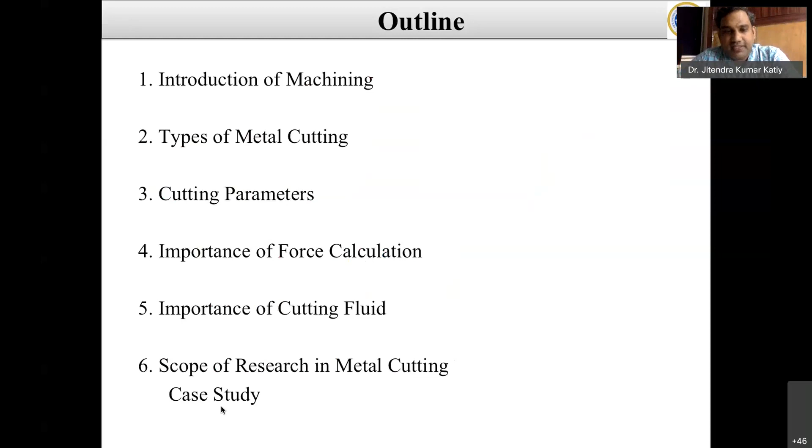In terms of metal cutting, this is a machining process, and from this process we remove material to shape a particular desired final product. We remove excess material from the workpiece in the form of chip. Chips are generated in a larger way, and it is the most important manufacturing process among all. By this process we can get the final shape, size, and metal removal, either directly or indirectly.

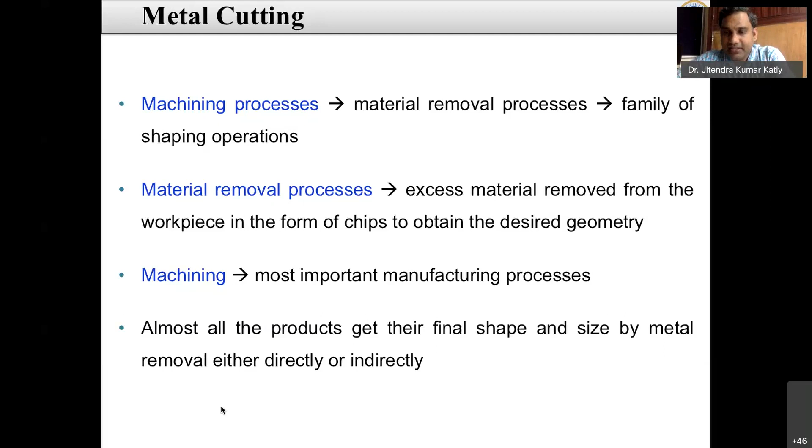There are various types of material removal processes: traditional and advanced process. Traditional includes the metal cutting process like turning. Traditional is further divided into two groups, cutting and finishing. This cutting is further divided according to whether your object is circular shape or non-circular shape, and according to that we choose the particular machining process.

In finishing process also we can choose two types, either using bonded abrasives or loose abrasives. Bonded abrasives like sandpaper is the cheapest one, and loose abrasive is where you spray the particle, like buffing, lapping, and polishing.

Advanced processes are nothing but non-traditional or unconventional processes, like electric discharge machining, electrochemical machining, electrochemical grinding, electric discharge grinding, and drilling. These are the various kinds of advanced processes where your tool and workpiece are not in contact.

But in the traditional process, your tool and workpiece are in contact. That is very important, because when two bodies are in contact, friction and wear always happen.

The machining is performed by two types of cutting tools, single point cutting tool or multiple point cutting tool. Single point cutting tool is basically used in lathe, shaper, planer like this. Multiple point cutting tool is used in drilling or milling.

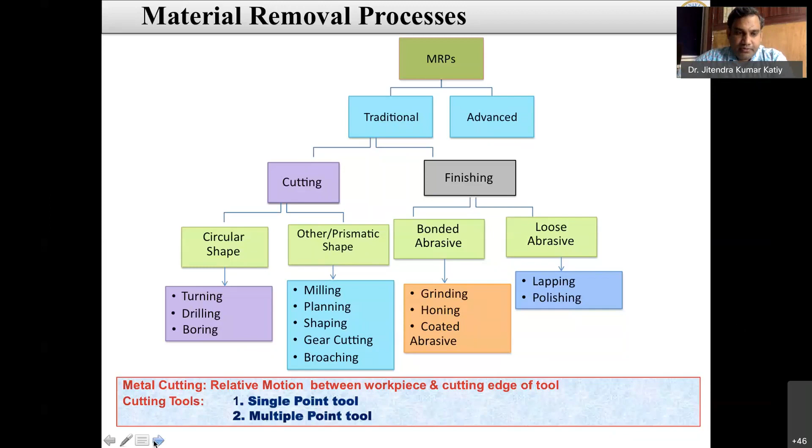Important points to note about the characteristics of metal cutting: you can improve dimensional accuracy and tolerances, and also achieve internal or external features. The only drawback in metal cutting is that you remove a large amount of material from the surface in the form of chips, and there are disposability issues with those chips. It is also the most expensive among all the manufacturing processes.

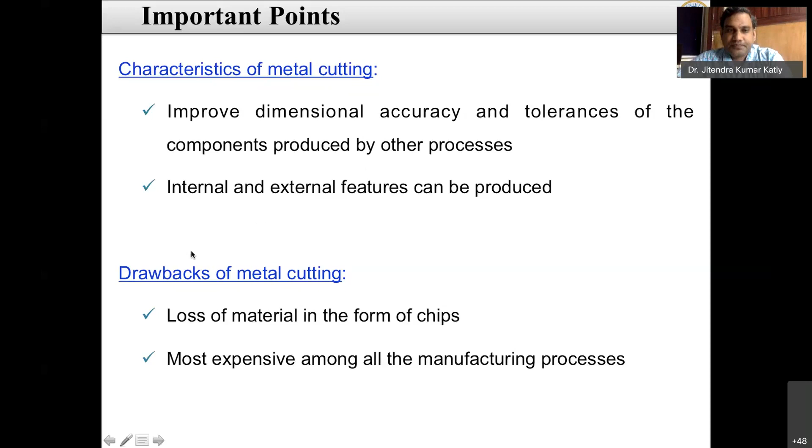There are two types of cutting: 2D cutting or 3D cutting. 2D cutting is known as orthogonal cutting, and 3D cutting is known as oblique cutting process. In oblique cutting, the tool has some inclination with the workpiece, while it is perpendicular with the cutting speed in orthogonal cutting. That is the only difference between orthogonal cutting and oblique cutting.

Most experiments performed in a normal workshop are oblique cutting. There are three forces acting over the surface, like in turning and milling, and these are all performed in oblique cutting. Only if you want to cut a rod would you go for orthogonal cutting, so this is the least used process compared to oblique cutting.

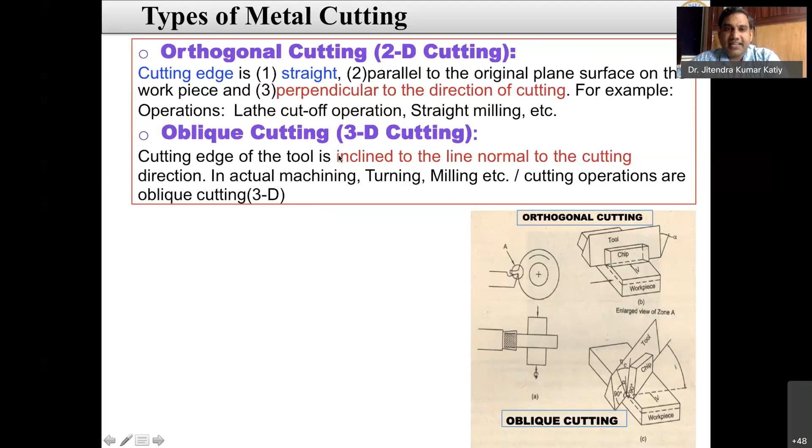In metal cutting, there are various machining conditions: what type of workpiece material you want to turn, what type of cutting tool, what is the cutting geometry, because the rake angle is widely important - either positive, negative, or zero rake angle. These are the principal cutting conditions, and all four cutting conditions are very important: cutting speed, feed, and depth of cut.

Nowadays, cutting fluid is also included as one of these conditions. That's why Taylor's tool life equation is VT^n equals constant.

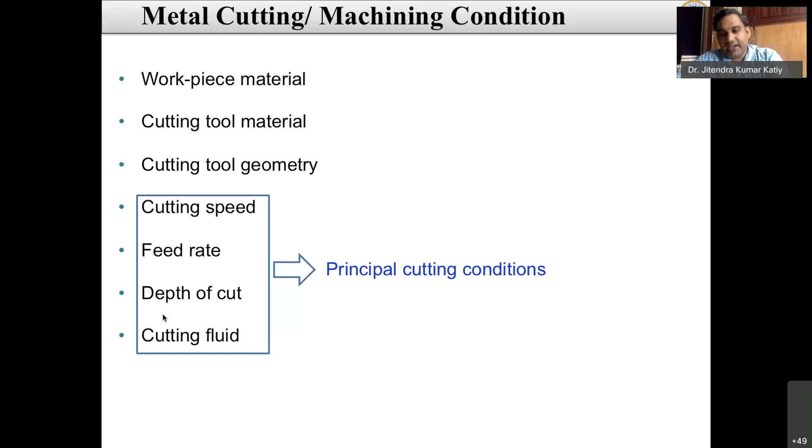After that, they modified and included the feed and depth of cut also in that particular Taylor's tool life equation. They just set some exponents, and that feed exponent is always greater than the depth exponent. So these are the few important parameters in cutting conditions which affect the material removal rate and the wear of the tool surface.

So why do we need this calculation of forces? Why do we analyze the cutting forces? By analyzing these forces, we can estimate the power requirement of the machine tool. According to that, we can design our machine tool and select the motors for that particular machine tool.

We can also improve static or dynamic stiffness of the machine tool using these force calculations. You can improve part accuracy from the tool-workpiece deflection also, because how much force it can exert depends on the tool stiffness, which is also very important.

Tool toughness and tool strength are also very important, so that it will not deflect. Because your tool acts as a fixed cantilever beam - one end is fixed and the other end has a point load. So in that way, we design the tool toughness and strength. These are the few design aspects in which cutting force analysis is very important. That's why cutting force analysis is important.

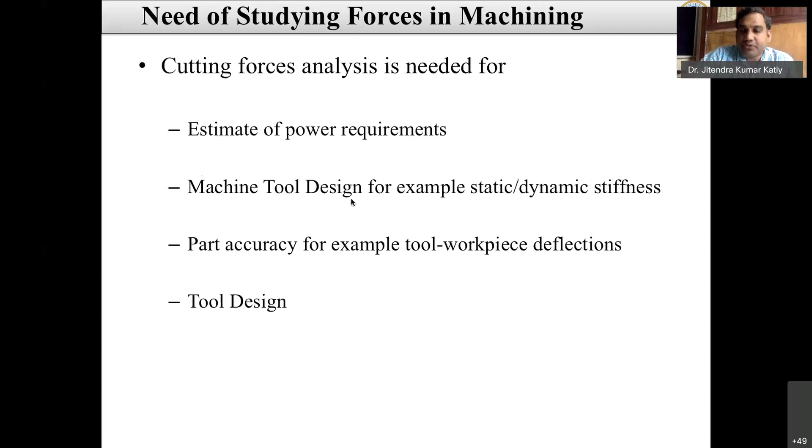There are three zones in metal cutting. One is called the shearing zone. This is the zone through which the material deforms and breaks, and flows over the work surface. It shears and flows over the tool surface and moves away in the form of a chip.

Another zone is the chip-tool interface. This zone is very important, because when the chip is sheared from the shearing zone, it has a very high temperature. Due to that high temperature, it can melt the material and diffuse some material over the chip, and that creates crater wear over the rake surface and flank wear over the flank surface.

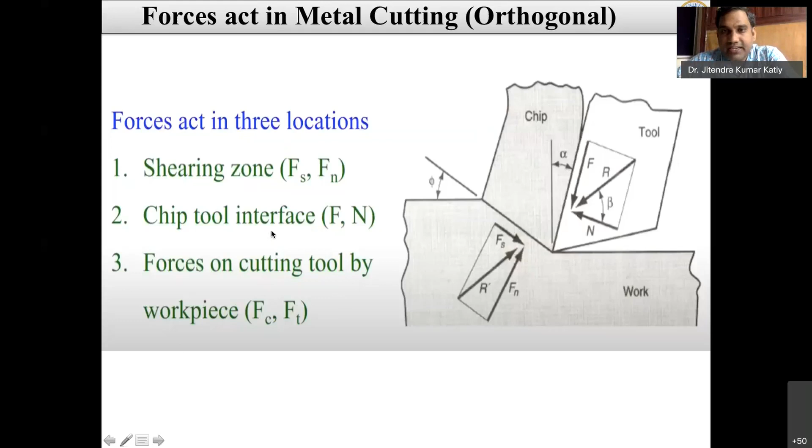So for this force measurement, we install our force dynamometer, and this is the tool. You can see here the sharp edge, and this is the rake face through which your chip is moving.

This force dynamometer has three piezoelectric sensors. According to the deflection exerted by the tool through the workpiece, these piezoelectric crystals deflect, and they give output in the form of voltage - either millivolts or microvolts.

That voltage is further converted into force through LabVIEW software. So this piezoelectric sensor only gives you the signal in the form of voltage.

So which force is greater in that particular turning operation? According to how much the piezoelectric crystals deflect, you get the force or a higher peak in any direction - Fx, Fy, or Fz. That is the force measurement, and piezoelectric crystals are widely used because they can sense deflection immediately - even a small deflection can be sensed by the piezoelectric crystals.

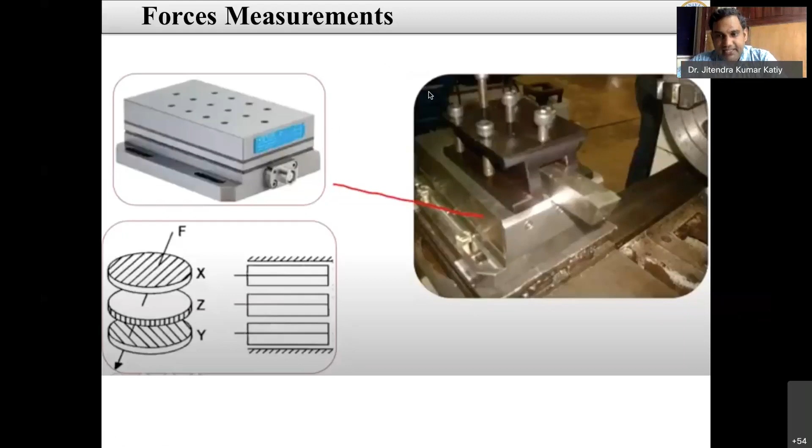So with these assumptions, how can we calculate the force? We know the theory given by Eugene Merchant in 1945.

They calculated the force using 2D force analysis, known as orthogonal analysis, by taking certain basic assumptions: the tool is very sharp, perpendicular to the velocity, and the material is perfectly plastic and rigid.

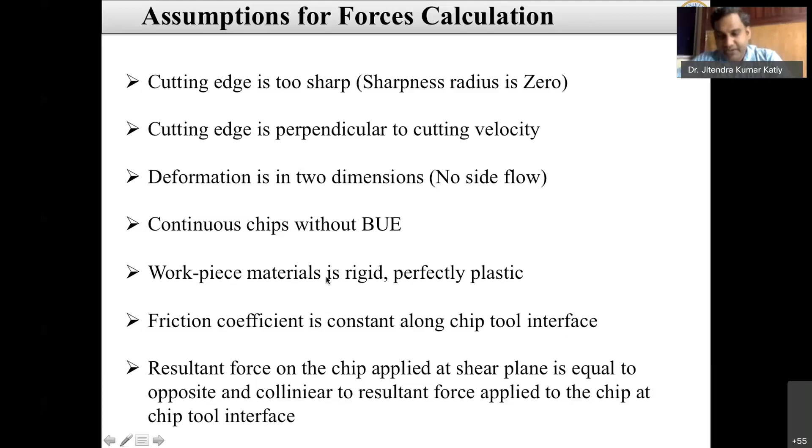These are the various assumptions taken by Eugene Merchant, and using this force analysis, they constructed a circle. Why did he choose the circle? Because in the circle, each element, each force, is at 90 degrees. We know the ninth class theorem that if the circle's periphery is 90 degrees, then the hypotenuse passes through the center of that circle.

That's why he chose the circle only, that's why it is called the Merchant circle, not any other geometry. Because all the angles on the periphery are 90 degrees, and this resultant passes through the center of the circle. After this, they can analyze the force analysis in terms of shear force or rake angle.

These two you can calculate by using formula. FC and FT you can know by the force dynamometer, and you can calculate the shear force so that you can analyze the shear stresses and other things. You can also analyze the frictional force so that you can at least reduce it in some aspects. That is very important in tribological aspects.

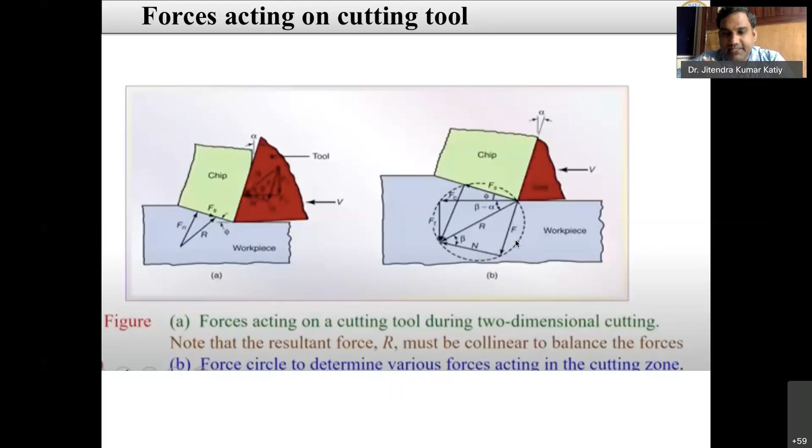And if your speed is high and depth of cut and feed are low, then the thin zone model is always selected for simulation. This slide is only for simulation purposes, if you want to do some simulation work in that particular tool-chip interface, and to decide what type of model you will select. So now we move to the chip-tool interaction.

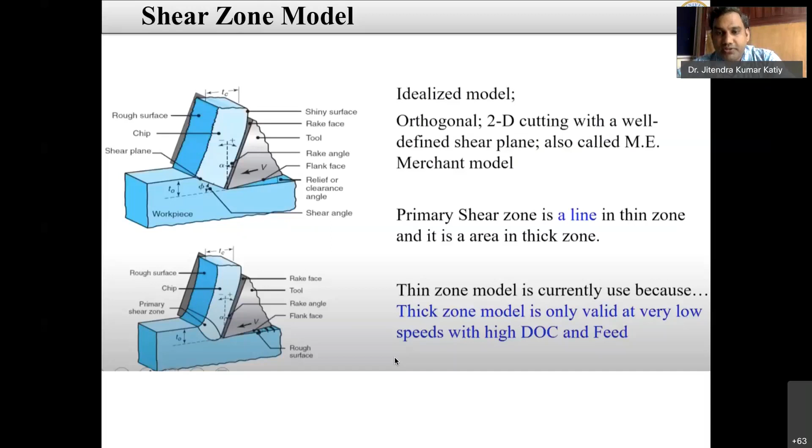That is very, very important, because the second highest heat generation is at the surface, and because of that the crater wear happens over the tool. So how did this come to be understood, back in the 1970s?

This chip-tool interaction was first studied by a French scientist. In this particular study, he took a transparent tool for cutting so that he could observe each and every aspect, and constructed a setup to study the chip-tool interface.

He observed that the chip material is sticking to the rake surface. It first sticks because of the high temperature, and because of high speed it also slides after some time. So due to this sticking, sliding then happens. Sticking and sliding in between causes diffusion of the chip material into the tool material.

That's why crater wear is always away from the nose, because the nose temperature is very high. So right at the nose you can't get crater wear, but it occurs a little away from the cutting edge. This is because of the sticking region followed by the sliding region. When it sticks, no material is eliminated from the surface, but when it tries to slide after sticking, then material is eliminated. That is the basic reason for these two zones observed in chip-tool interaction.

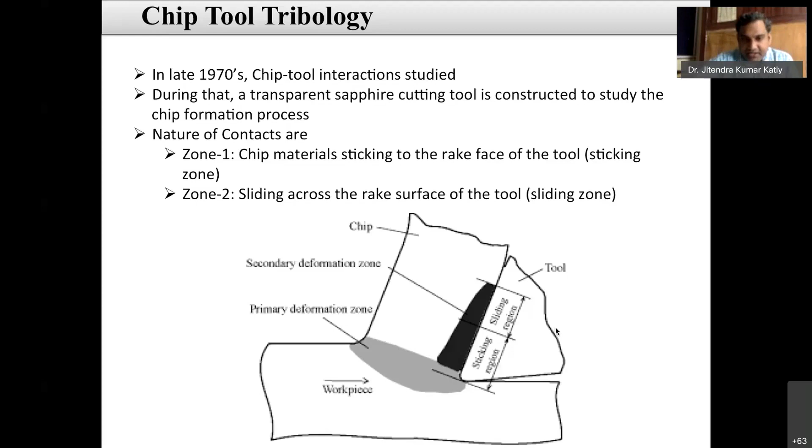After that, in the sliding zone, the locking becomes delocking, and the chip slides over the surface. So that is the main fundamental schematic through which the mechanism of chip-tool interaction is given, by this IJMTM study.

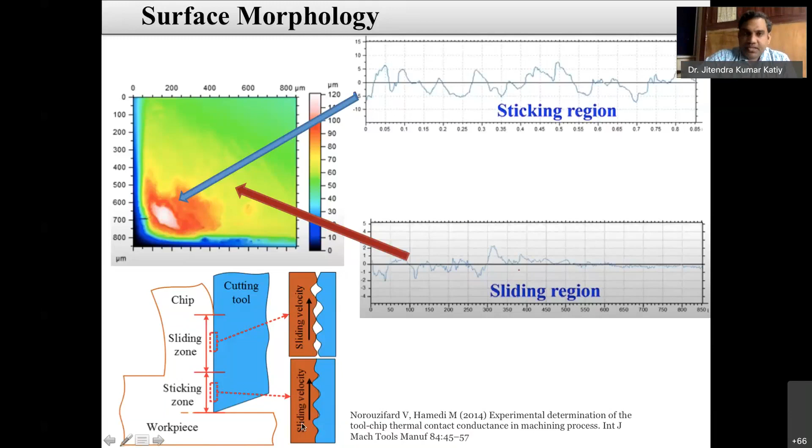So further, we know that for cutting fluid, there is conventional wet machining, where we can use flood cutting tool cooling. So why do we need metal cutting fluid in that particular case?

So first reason, you can remove the heat at the interface. You can easily remove the chips, reduce the tool wear, and also you can obtain a better surface finish. So that's why we use the cutting fluid, and that is very, very important.

Which type of cutting fluid you can select is important. Nowadays, because of environmental issues, we are focusing on biodegradable cutting fluid. So that is also necessary. You can use vegetable oils by mixing in some nanoparticles. That is why we need to use nanoparticles, because nanoparticles have better thermal conductivity, which is very important to transfer heat from the interface.

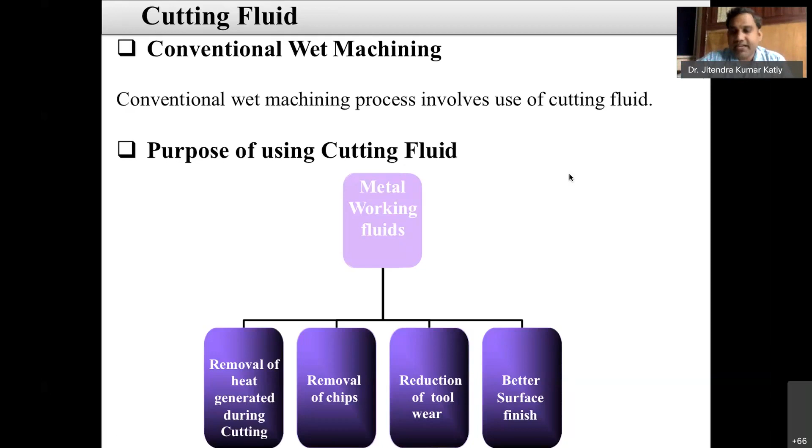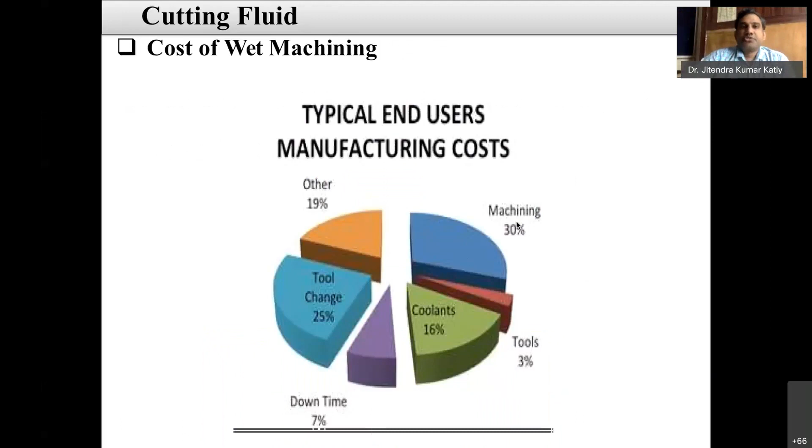So the major problem with the conventional process is that if you are using flood cooling, then you will get dirtiness in your floor space, corrosion and contamination of lubricating systems, pollution and health hazards because fume is generated. That fume also creates skin cancer for whoever operator is working in that particular space. It also needs storage and additional floor space, pumping system, recycling and disposal. So these are the few problems.

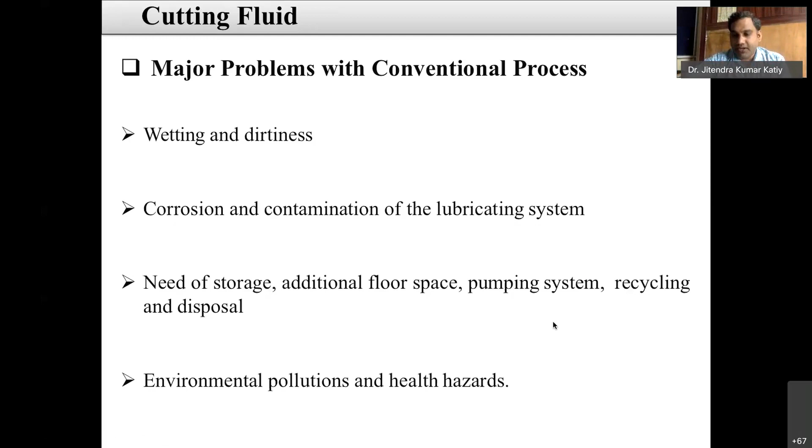That's why it is very important to move from conventional cooling to minimum quantity lubrication, where 100 ml of lubricant is enough for machining 1 hour or 3 to 4 hours.

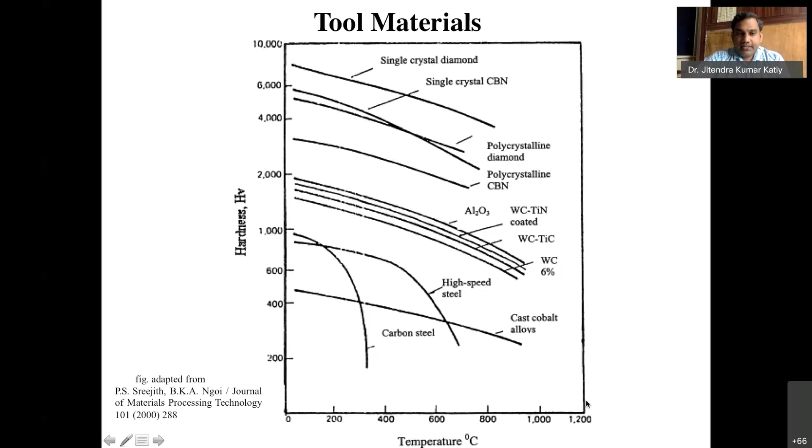So we move to minimum quantity lubrication machining. Here, as I told you, we use a very small quantity of lubricant applied on the cutting zone. This minimum quantity lubrication is applied with compressed air. So in that particular lubricant, you can add nanoparticles, and those nanoparticles can impinge on the cutting tool along with the air.

Normal consumption is restricted to 10 to 100 ml per hour according to our flow rate, whatever flow rate we have given. So optimum flow rate is also very important in minimum quantity lubrication. Optimum pressure is very important too. How much quantity of oil and air can be mixed also affects our performance.

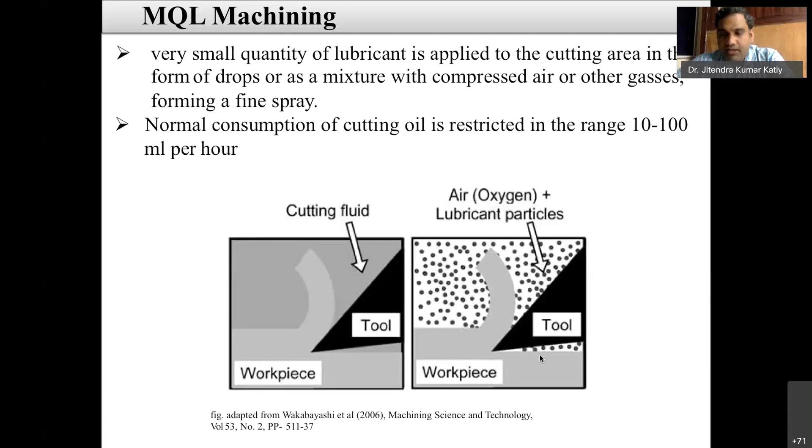So this is the widely used current trend in machining using minimum quantity lubrication. Whether you are working in grinding, milling, shaping, planing, drilling, whatever, this minimum quantity lubrication plays a very important role to avoid flood cooling. This minimum quantity lubrication, in terms of thermoelectric cooling systems, is also very important.

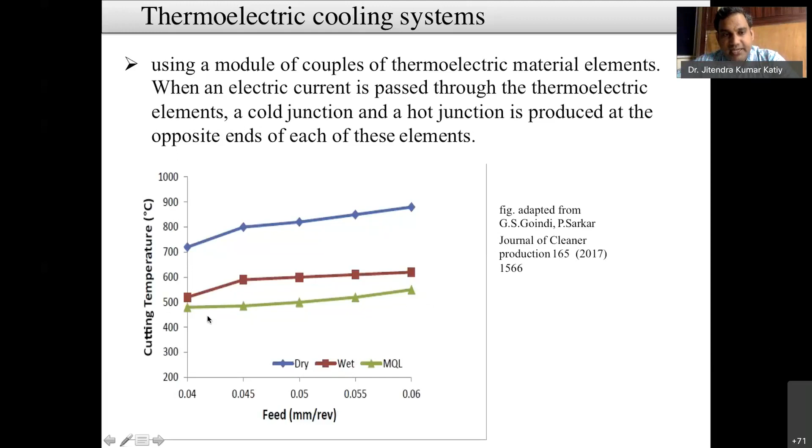This is because your nozzle has high impact at the cutting zone. So that high impact cutting fluid reduces the temperature, and it exerts thermal conductivity, meaning whatever temperature is generated, it can easily cool because of the high temperature increment of the cutting fluid over the zone. Because of that reason, in minimum quantity lubrication, even though cutting feed rate is increased, your cutting temperature is more or less the same in all cases.

So we move to our two case studies, what we did here at SRM-IST. In the first case study, as I told you, why we use the nanoparticle inside the cutting fluid is because we need to increase the thermal conductivity. And why we need to increase the thermal conductivity is so we can increase the heat transfer at the zone.

So in this study, what I will do is use graphite and talc nanoparticles mixed with coconut oil. According to vegetable oils, the fatty acids and other organic components can provide better lubricity properties rather than mineral oil and synthetic oils. So we used coconut oil because in the southern region it is easily available as a cutting fluid.

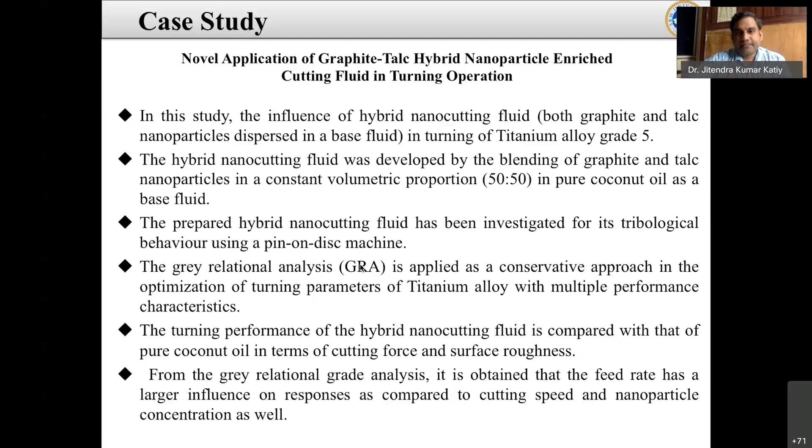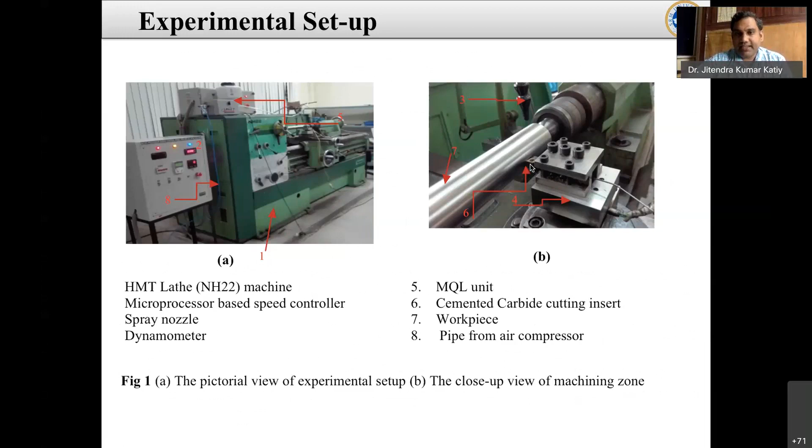Further, the compressed air from the compressor goes and mixes inside the minimum quantity lubrication setup pump along with the cutting fluid, and it goes through the nozzle to the zone where it is required. So this is the basic experimental setup of minimum quantity lubrication.

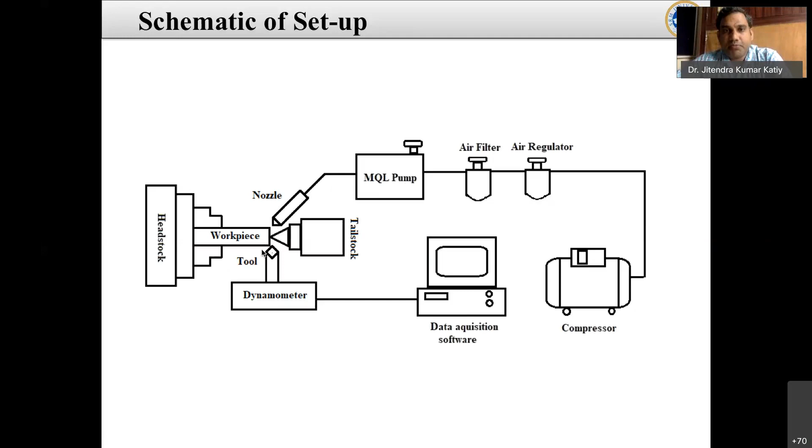Why did I choose graphite and talc? Because graphite gives a low coefficient of friction and talc gives high wear resistance property. Because of that reason I chose graphite and talc, since I had already published several papers on graphite and talc during my doctorate. So I thought here also I could choose graphite and talc and observe that factor's effect on the output parameter.

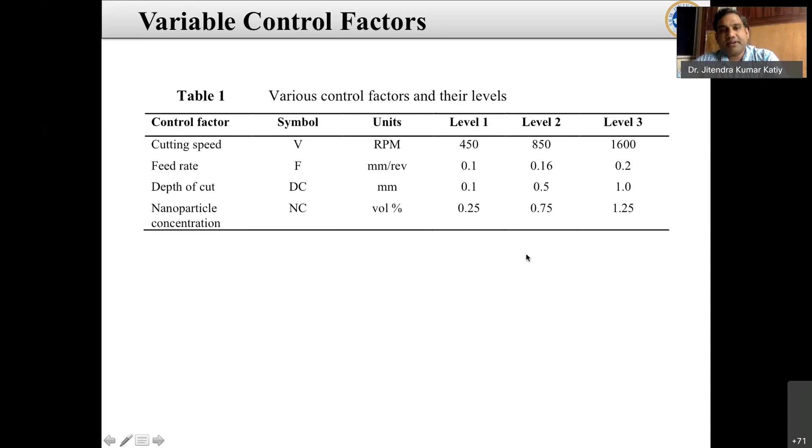These are the two machining response parameters: cutting forces and surface roughness. We performed a Taguchi analysis with a total of 9 experiments. From all those 9 experiments, we observed that 450 RPM, 0.1 depth of cut, 0.1 mm/revolution feed, and 0.25 nanoparticle concentration give us lower forces and also lower surface roughness.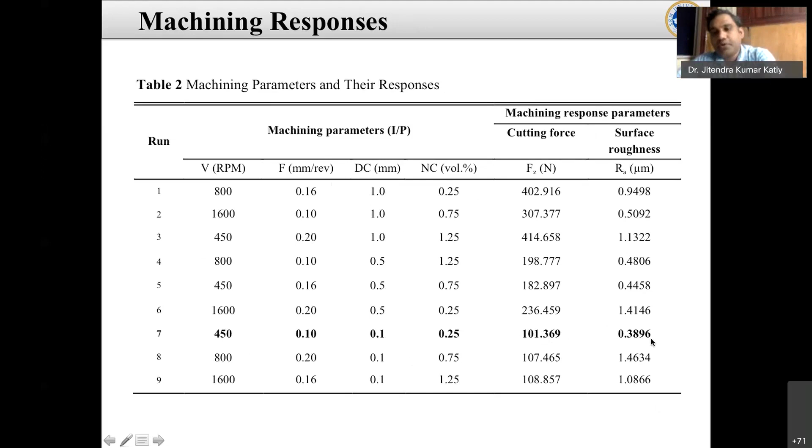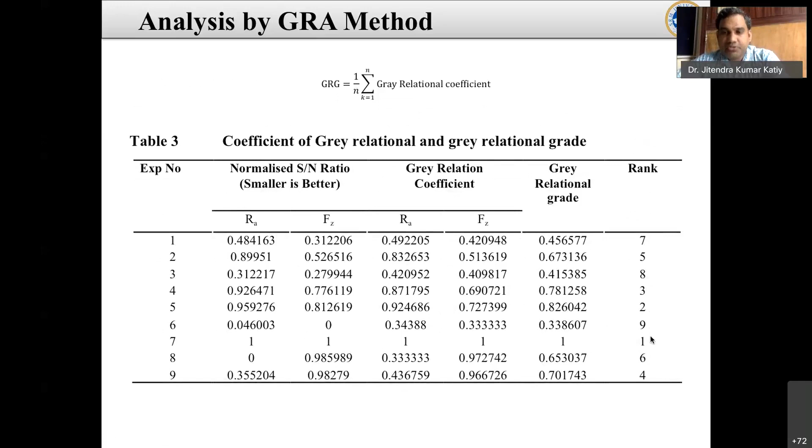After that we performed the grey relational analysis. Using this grey relational method, we analyzed the grey relational coefficient using this formula and ranked the experiments 1 to 9, since there were 9 experiments. Experiment 7 gives the most confident and most appropriate result compared to the others.

So which response is better, and which factor contributes more? That is also optimized using this grey relational analysis. So this is the velocity, this is the source, this cut here - this is the velocity that is in RPM, and this contributed only 13%.

Feed contributes more in this force and surface roughness analysis. After feed, depth of cut is very important. Nanoparticle concentration also contributes, but it is less than the other three parameters.

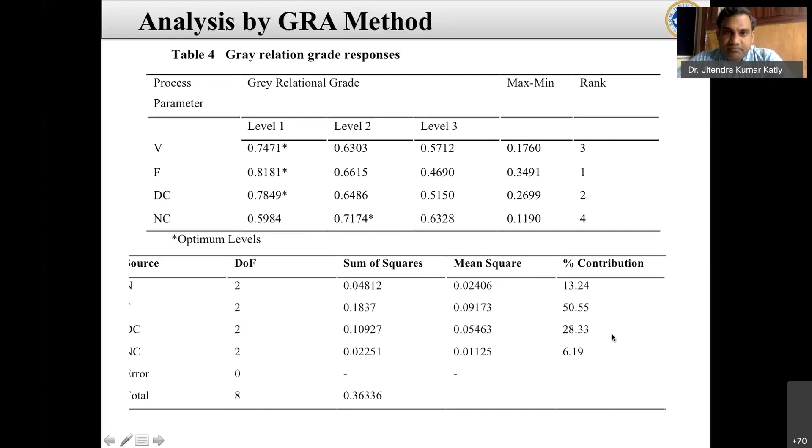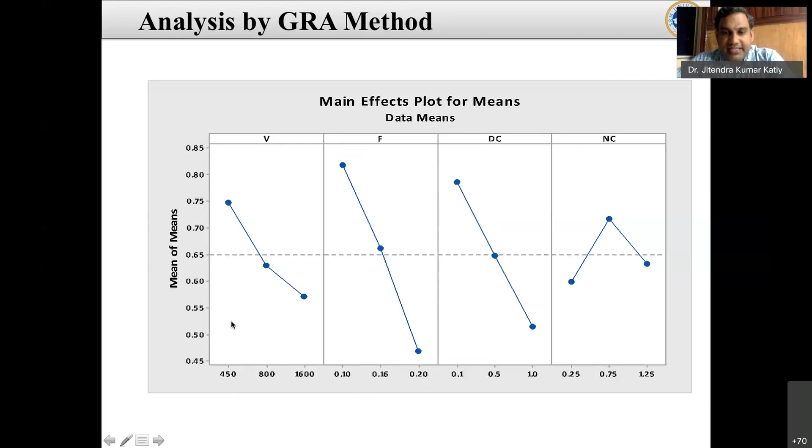These are the mean effect plots which we obtained by the GRA method. Here I obtained 450, level 1, 0.1, and 0.75, from maximum to minimum. So that is the main thing. These are the optimum parameters obtained by the GRA method.

We performed tests using these optimum parameters and then checked the corresponding response values. Since there were a total of three cross four, most of them totaling 81 experiments, in between I checked the confirmation test.

So with the graphite-talc nanofluid and pure coconut oil, you can see these optimum parameters. The forces are 68.4 and 86, so that is good.

But in case I randomly select another parameter, maybe that will also be there because of this GRA integrity, we can reduce the experiment. So that is a confirmation test, to check either that is correct observation or not. I performed this confirmation test and observed that the confirmation test and optimal test obtained by the GRA are within the range of 1 to 5%, which is an acceptable range.

And further, in terms of surface roughness also, we can get it in that particular range. So this variation in the response parameter with respect to pure coconut oil, I observed that the feed forces reduced by 21.19% as comparison to the pure coconut oil, and surface roughness improved by 18.9%. So these are good results by using this graphite and talc nanoparticle.

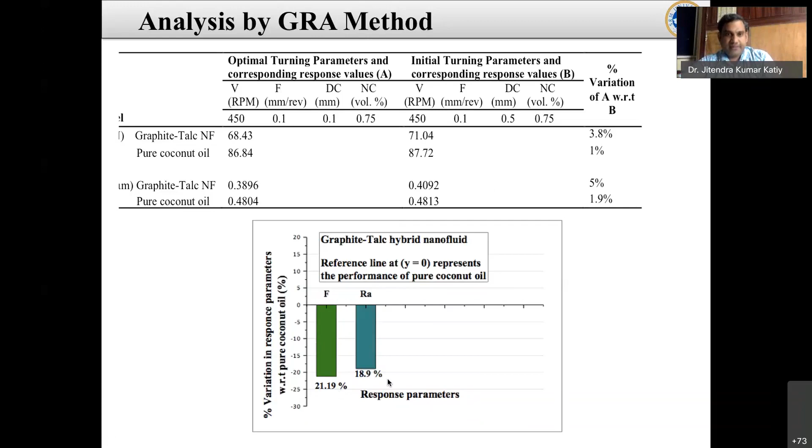So these cutting edges also we can take the image from the SEM analysis, and you can see here in experiment 7, which obtained the lower force and lower surface roughness, there was no flank wear or edge wear in that particular cutting edge. But in other cases, you can see very high wear over the cutting edge.

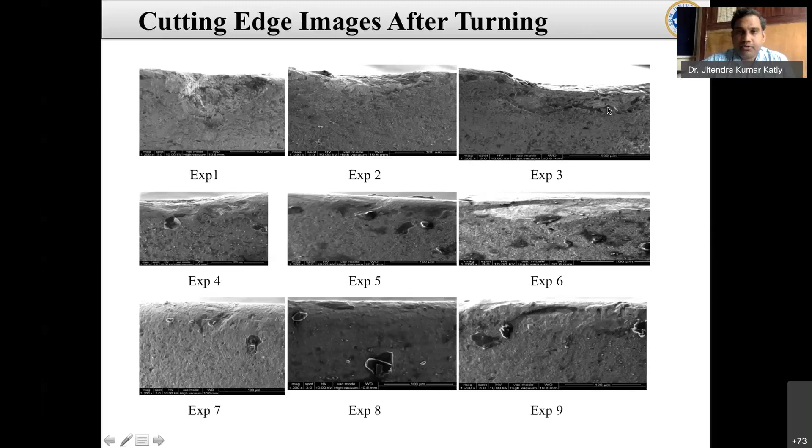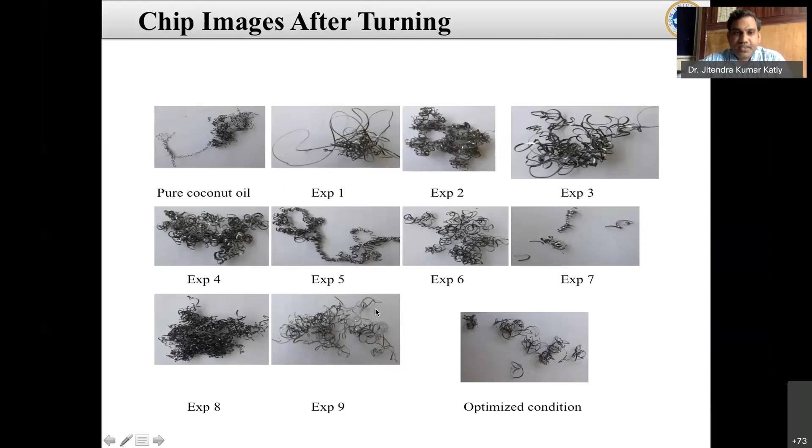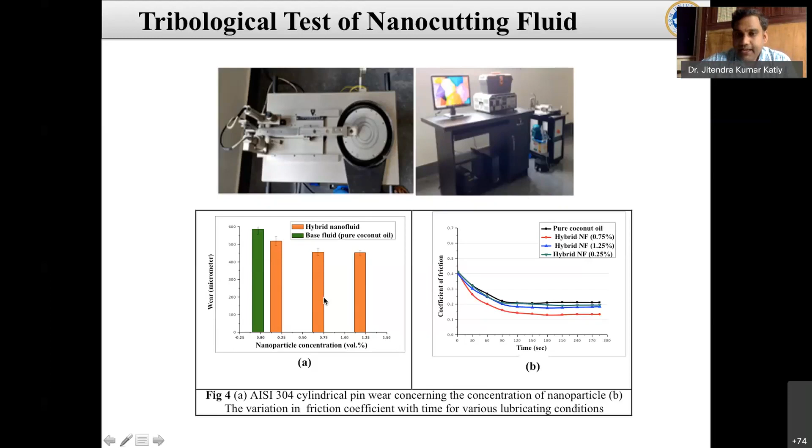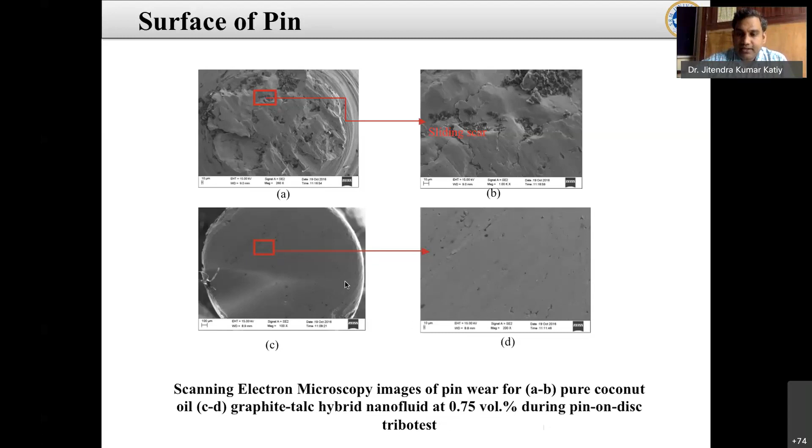That we can check by the pin surface morphology using SEM. Here you can see sliding scar and very high sliding wear over that particular pin with pure coconut oil. But when we added the graphite and talc, because of the lubricity property of graphite, lower lubrication, higher lubrication, and wear, talc gives high wear resistance. Because of that reason, you can see a very smooth surface over the pin using the graphite and talc nanofluid in between the EN31 and the pin. So that is the observation by the tribological characteristic.

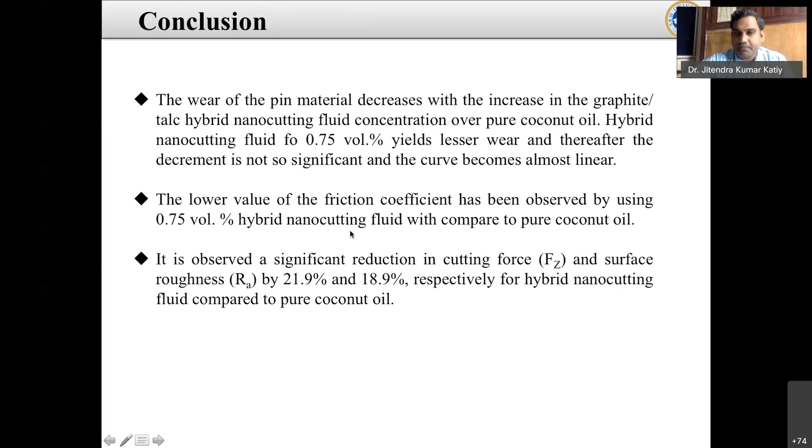So this is the overall conclusion which I observed: a significant reduction in cutting forces and surface roughness by this hybrid nano cutting fluid, 22% in cutting forces and 19% in terms of surface roughness, and lower values of friction coefficient observed with the 0.75 volume hybrid nano cutting fluid compared to pure coconut oil.

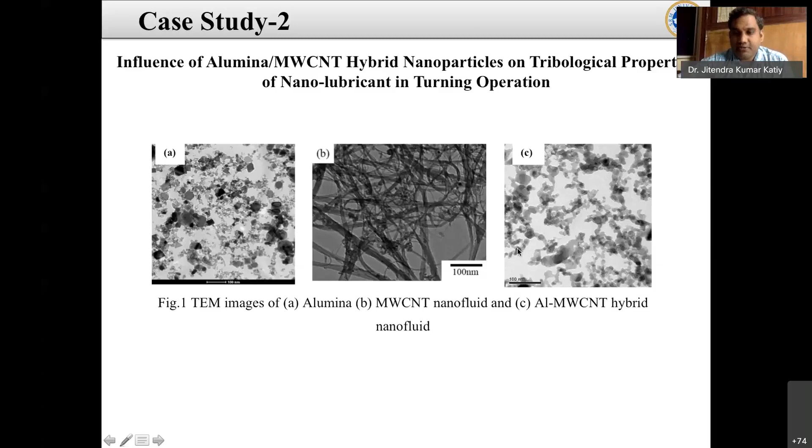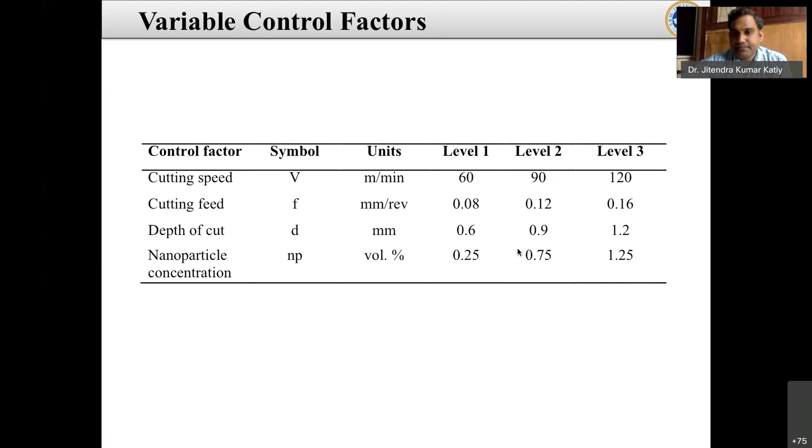Here also we chose 4 parameters at 3 levels: cutting speed varied from 60 to 120, cutting feed, depth of cut, and nanoparticle concentration. I used the RSM method for this.

In this RSM method, we performed 27 experiments and obtained the response variables as flank wear and temperature at the interface. This temperature at the interface was obtained using thermocouples placed at the K-type junction.

In this study, we observed each parameter to find where we get the lowest temperature at the zone and the lowest flank wear. We observed that 90 meters per minute, 0.08 feed, 0.6 depth of cut, and 0.75 nanoparticle concentration gives the better result in terms of temperature and flank wear.

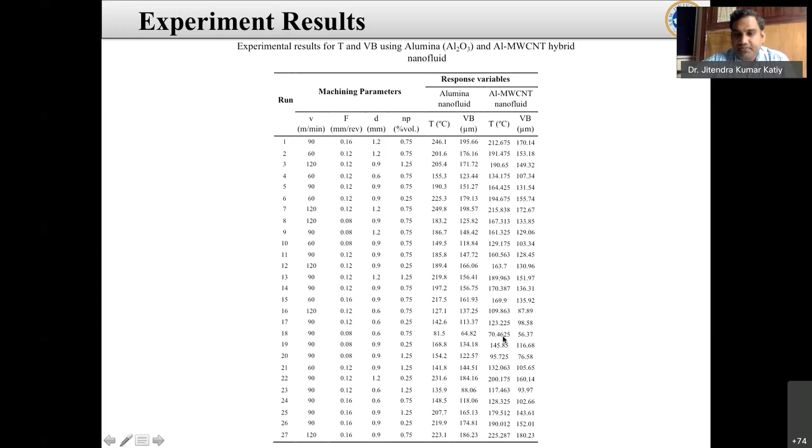So for minimizing the response parameters in the alumina nanofluid, the goal is to minimize the input variables, and the minimized response observed is 81.29.

In case of the hybrid nano cutting particle, we get a nodal temperature of 58.9 and lower tool flank wear. So apart from mono types of cutting fluid, hybrid types of nano cutting fluid are always better in machining, whatever operation you are performing—drilling, milling, or grinding.

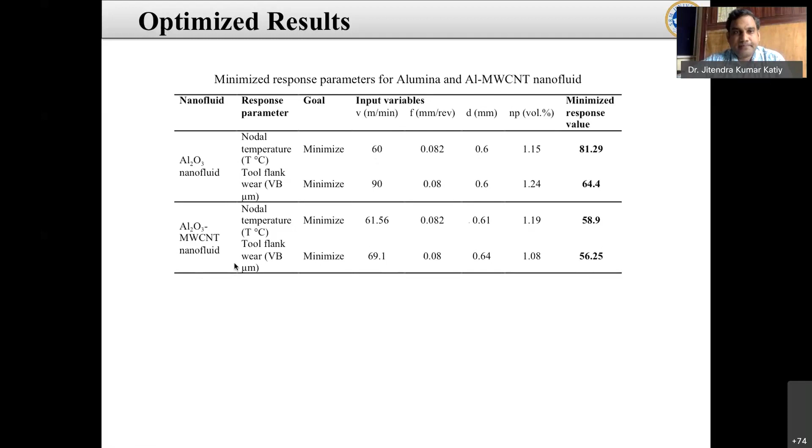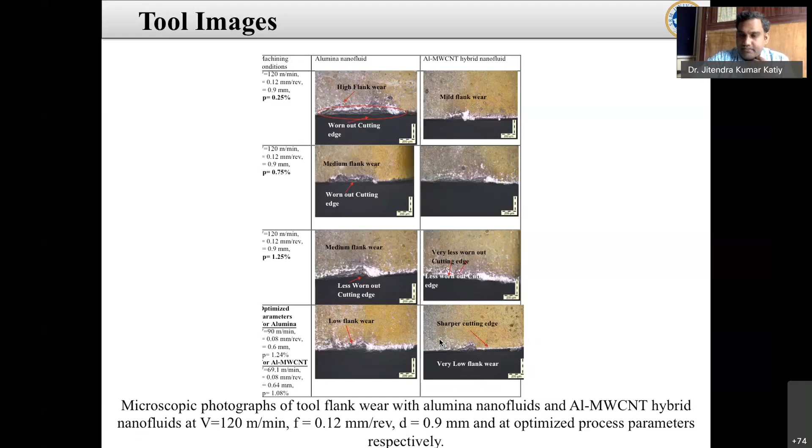Tribological results were also obtained for both types of particles on the same pin-on-disk setup. Since we use alumina here, there's no further explanation required.

Here you can see the alumina nano cutting fluid has a coefficient of friction greater than the hybrid cutting fluid. So initially, why does hybrid cutting fluid show a higher coefficient of friction?

Because when two particles are there, shearing takes place and it exerts more pressure over the surface. After that, this three-body phenomenon happens, and then it can easily roll. Initially, the pin slides over the particle, so the coefficient of friction is high, but after sliding, it starts rolling, and rolling friction is always lesser than sliding friction. Because of that, friction goes down at the interface with respect to time, and wear is also less in case of the hybrid nano cutting fluid.

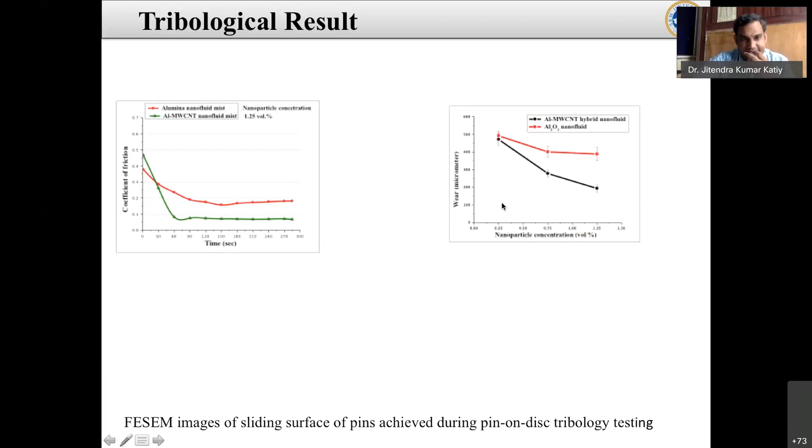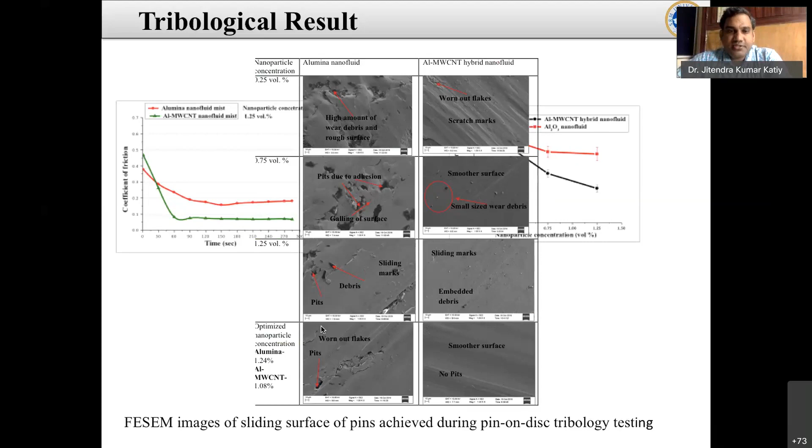This tribological analysis over pin-on-disk is only for understanding the behavior of the cutting fluid used in machining through minimum quantity lubrication. The same possible mechanism applies in this particular case as well, and this paper is also published in Friction, which has an impact factor of 5.2.

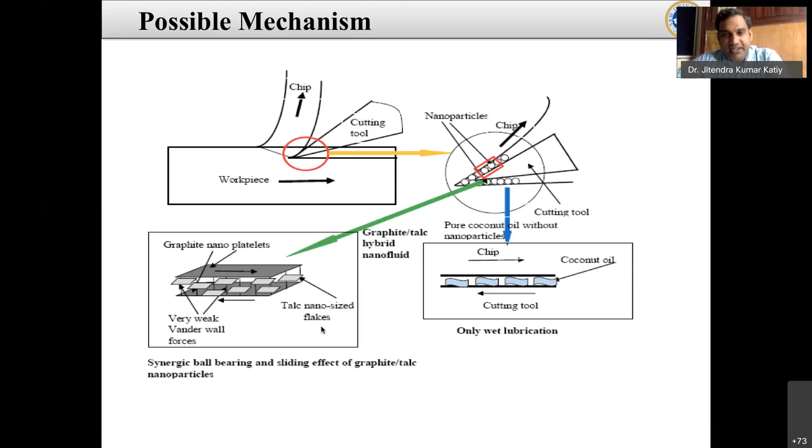So the conclusion from these results is that by mixing MWCNT and alumina, the thermal conductivity is also enhanced by 2.6%.

I have not shown the thermal conductivity result data here, but I have done it, and it increases with the increase of nanoparticle concentration. So by using the nanoparticle, we can increase the thermal conductivity, and that is very useful for the extraction of heat at the interface.

Hybrid nanofluid also shows lower coefficient of friction compared to monotype nanocutting fluid, and smallest contact angle also we can get. That is one reason. Through water contact angle wettability, we can say the adhesive property, and if it is more adhered to the surface, then it can provide better lubricity like oil. That is the only reason we performed the water contact angle test also.

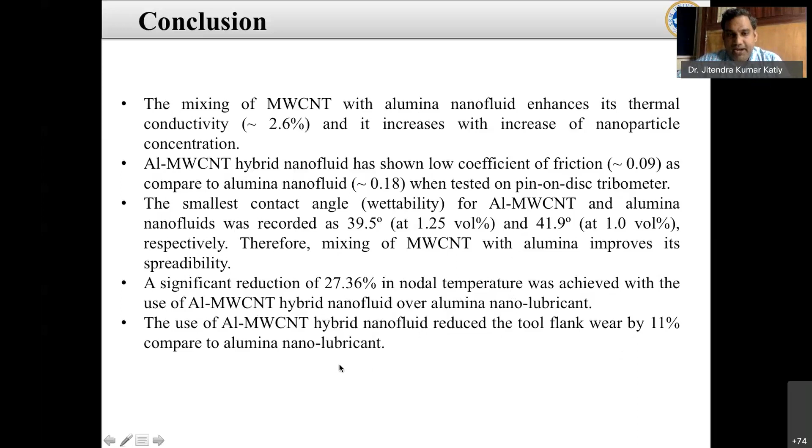Overall, we observed a significant reduction of 27.3% in nodal temperature in case of the hybrid cutting fluid, and 11% reduction in flank wear in case of the hybrid nano cutting fluid with aluminum and multi-wall carbon nanotube. So in this type of work, still various scope of research is there.

You can get very good publications easily in this area. You can analyze the influence of hybridization of different kinds of nanoparticles in 50-50 proportion. You can also explore various combinations of nanoparticles in various concentrations. Also, you can optimize the volume fraction of nanoparticle in cutting fluid. You can study and develop suitable nano cutting fluid for superalloys like Hastelloy or titanium or Inconel high entropy alloys.

Because these are the different kinds of alloys nowadays used in various applications in the aerospace and space industry.

Additionally, you can also investigate by considering the different shape, size, and concentration of nanoparticle on machining performance. And also you can optimize parameters further, considering the optimization process by Taguchi or RSM for flow rate, spray distance, because the distance between nozzle and tool is also very important.

That is very important, like in abrasive water jet machining. If your nozzle is very far, then you will not get a good shape in abrasive water jet machining. So this distance between the nozzle and the tool interface is very important, and the angle is also very important. What angle you get also affects the machining performance.

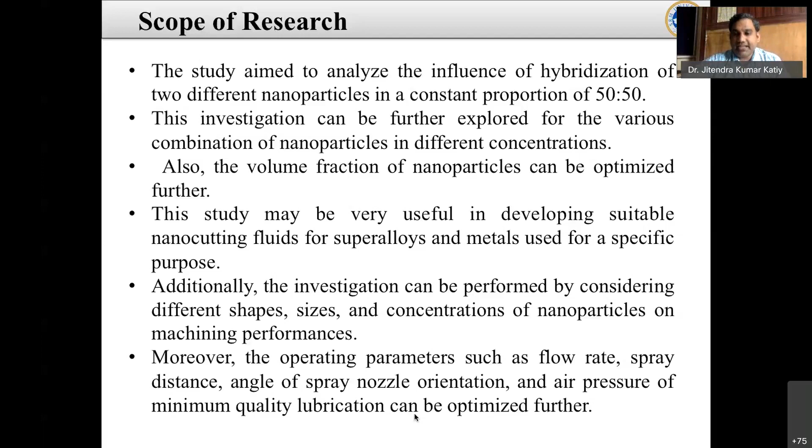I have published two books, as sir mentioned initially. These are the two books: Automotive Tribology, and Tribology Influence and Application. If you are interested, you can read those two books. Several chapters may be of interest to you. So thank you very much. If you have any questions, you can ask me.